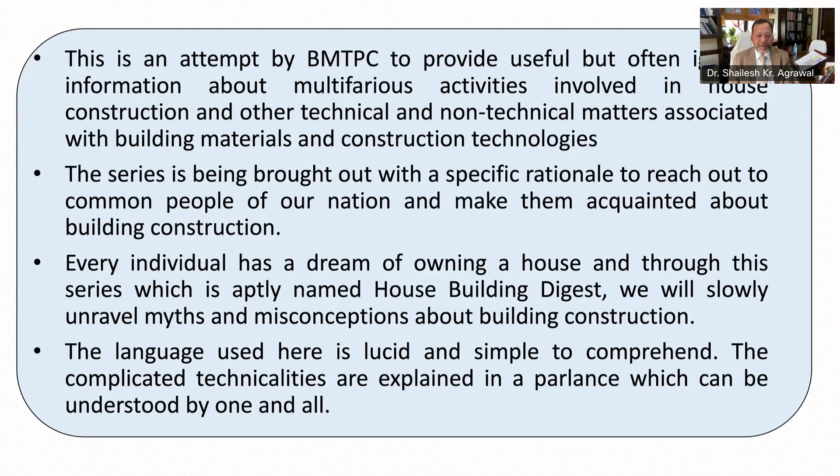Through this digest series, BMTPC is reaching out to the common man to provide useful information about various essential activities involved in house construction, including technical and non-technical matters associated with building materials and construction technologies. Every individual has a dream of owning a house, and through this series, we will slowly unravel myths and misconceptions about building construction. The language used here is simple so that it is understood by one and all.

A house should be constructed in a manner that it does not allow or prevent, or at least minimizes, the ingress of moisture within. In other words, the building should be dry once it has been occupied. It calls for adequate precautions during construction as well as during its occupation. Otherwise, it leads to dampness of various elements of the house, causing unhygienic environment.

Damp environment is also the root cause of various diseases like pneumonia, rheumatic fever, common cold, etc., to name a few. It also precipitates damage to walls, plasters, paints, floors, roofs, which end up in foul smells and unhealthy, unhygienic living conditions besides being unsightly. Termites also tend to grow in damp environment, which affect the furniture, clothes, books, documents, etc.

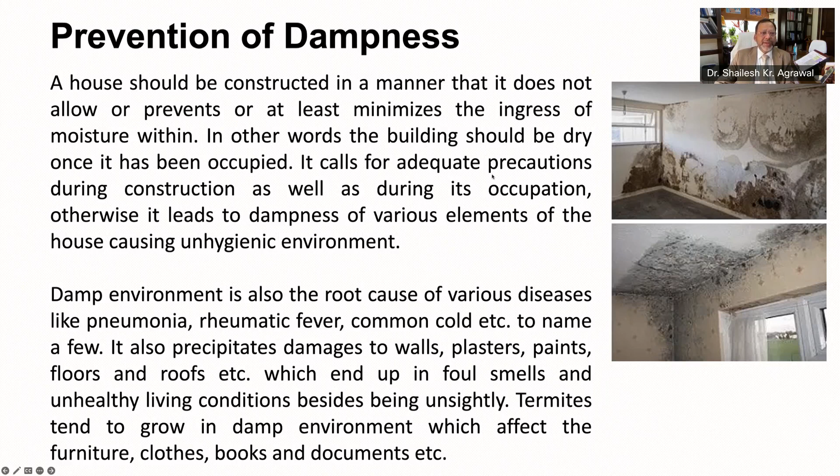Dampness can occur on account of rain, which strikes on the exposed surfaces of the house and finds its way within through the walls and joints, etc. It can also occur if proper precautions are not taken in its architectural or engineering design, use of inferior quality of materials, bad workmanship, insufficient supervision, and non-adherence to the construction specifications.

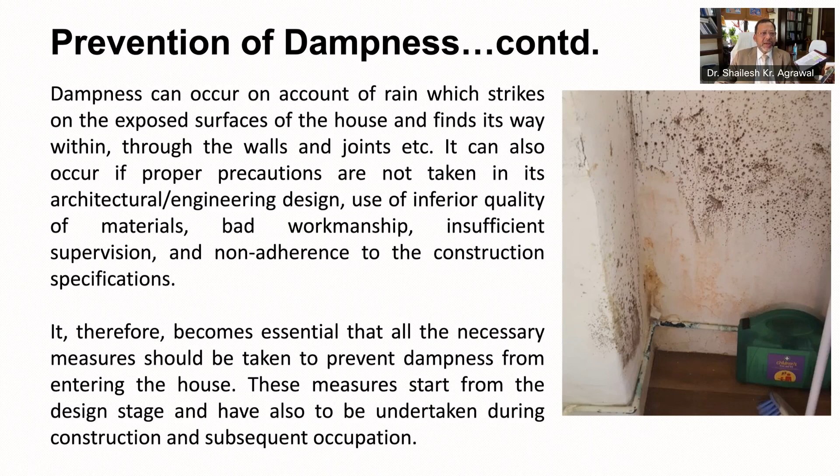It therefore becomes essential that all the necessary measures should be taken to prevent dampness from entering the house. These measures start from the design stage and have also to be undertaken during construction and subsequent occupation. Accordingly, the house should be maintained properly and the defects rectified as and when noticed.

The treatment given to prevent leakages in the house is generally termed as waterproofing, whereas treatment given to keep the walls, floors, and basement dry is termed as dampproofing. The house owner is advised to seek the help of an architect or an engineer for carrying out waterproofing and dampproofing in the house. Let's discuss the defects.

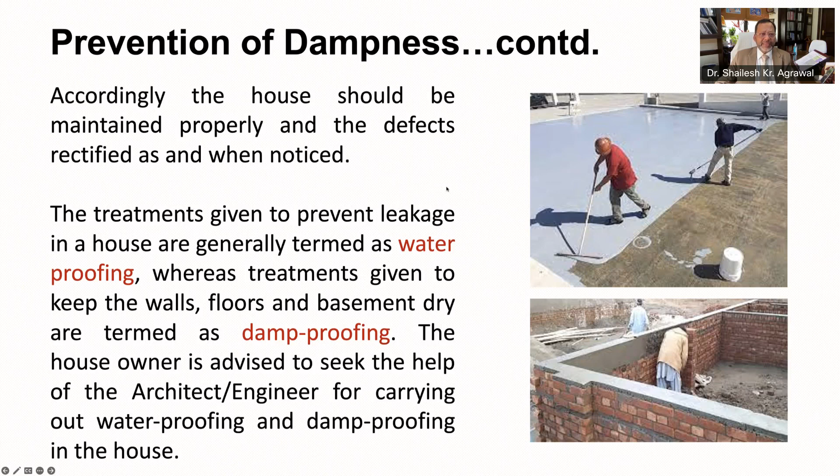The defects caused by dampness can broadly be summarized as under: growth of termites, occurrence of efflorescence, which ultimately results in disintegration of bricks, tiles, stones, or any other cladding material, softening of plaster, bleaching and flaking of paints with formation of colored patches, corrosion of metals, deterioration of floors and roofs, deterioration of electrical fittings, rotting of timber, breeding of mosquitoes, unhealthy living conditions.

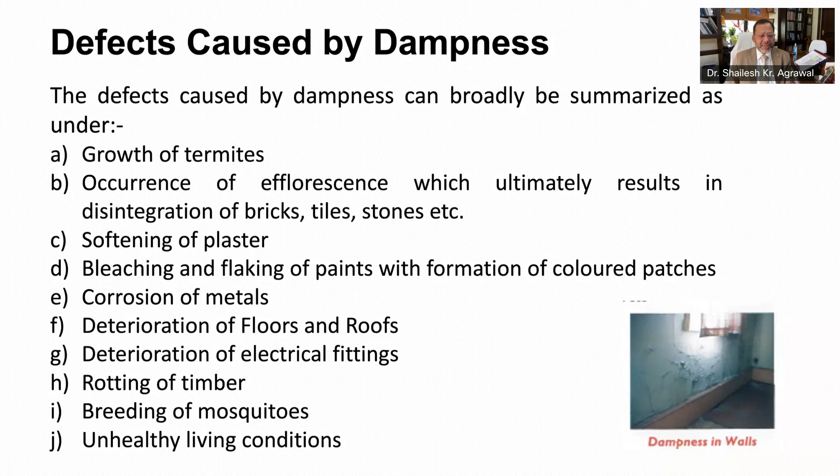Moisture absorption in the structure of the house is one of the chief causes of dampness. It may occur on account of penetration of rainwater or on account of defective construction. The coarse and granular nature of building materials results in the moisture finding an easy access through the voids therein, and this, aided by capillary action, assists the moisture to travel in different directions.

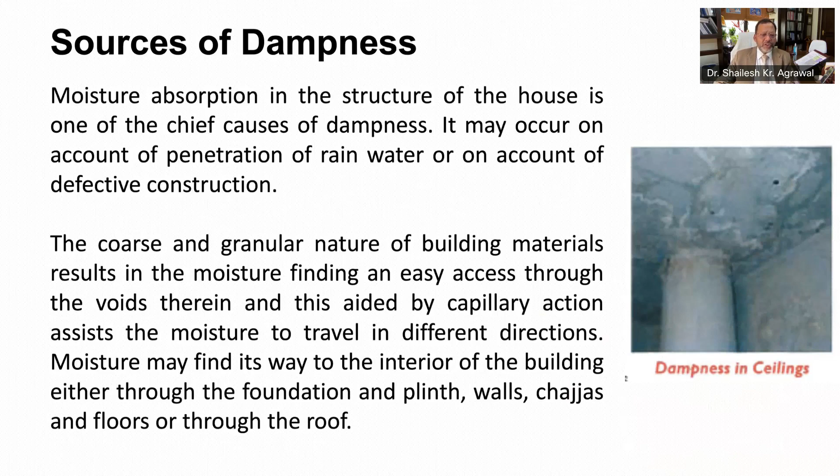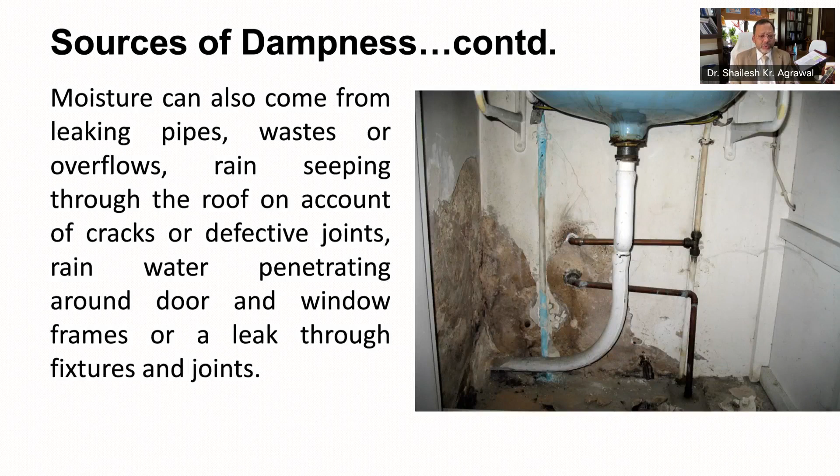Moisture may find its way to the interior of the building either through the foundation and plinth, walls, chajjas or sunshades, and floor, or through the roof. Moisture can also come from leaking pipes, waste or overflows, rain seeping through the roof on account of cracks or defective joints, rainwater penetrating around door and window frames, or a leak through fixtures and joints.

Broadly, dampness can occur in a house on account of the following reasons: dampness rising through foundations, splashing rainwater on the walls, penetration of rainwater through unprotected tops of walls, parapets, etc., inadequate slopes in flat roofs, defective terracing on roofs, and improper rainwater pipe connections, defective junctions between roof slabs and parapet walls, condensation of atmospheric moisture, leakages in wet areas of a building like kitchen, bathrooms, WC, etc.

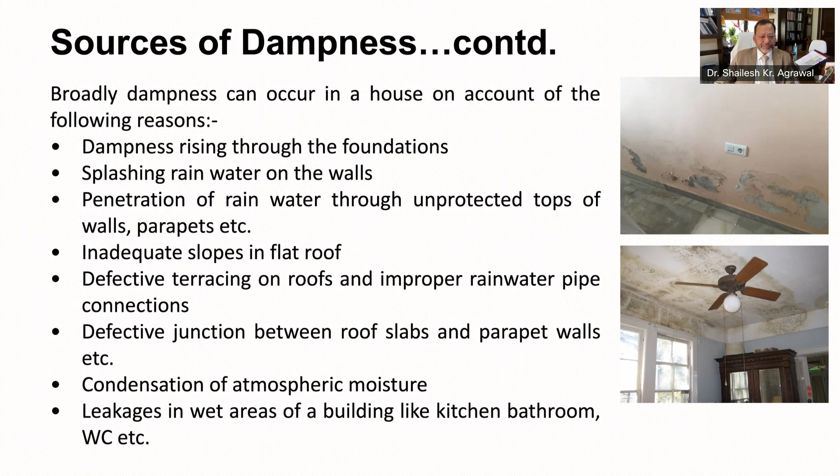Building science has come up with a number of methods for the prevention of dampness in a building. These methods can broadly be classified as membrane dampproofing, integral dampproofing, surface treatment, and guniting. Let's look at them one by one.

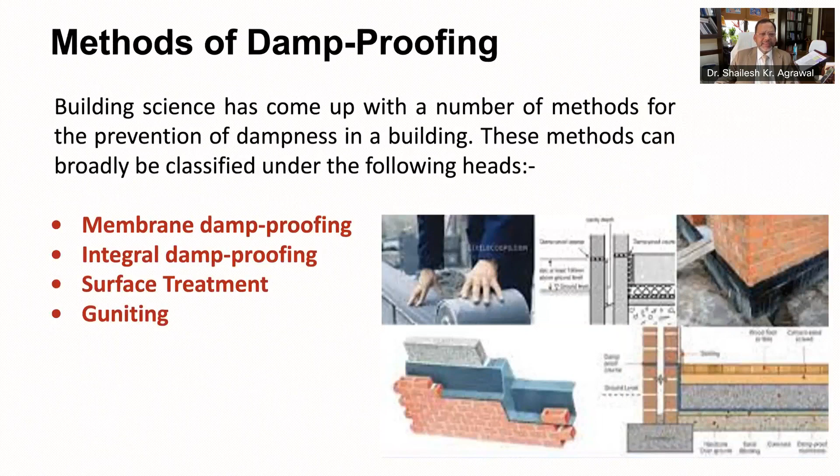Membrane dampproofing consists of providing a layer of water repellent material or a membrane between the source of dampness and the element of the structure. This type of layer is generally known as dampproofing course or DPC. It may comprise materials like bitumen felt, mastic asphalts, polymers, plastic or polythene sheets, cement concrete, etc.

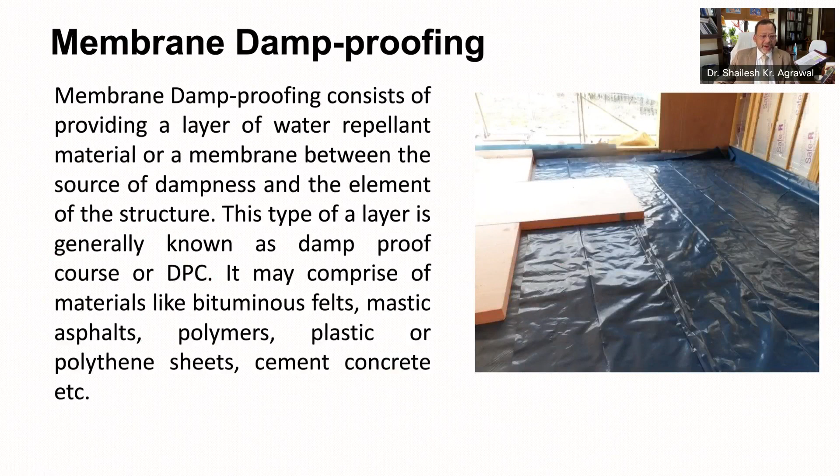Integral dampproofing is a process of making certain building materials impervious such that water is unable to penetrate through it. This generally involves adding specified dampproofing compounds in cement for the concrete or mortar mix. Such compounds are available in the market in powdered as well as liquid form. The quantum of waterproofing compounds to be added in cement depends upon the manufacturer's recommendations. Generally, 1 kilogram of such a compound is added per bag of cement.

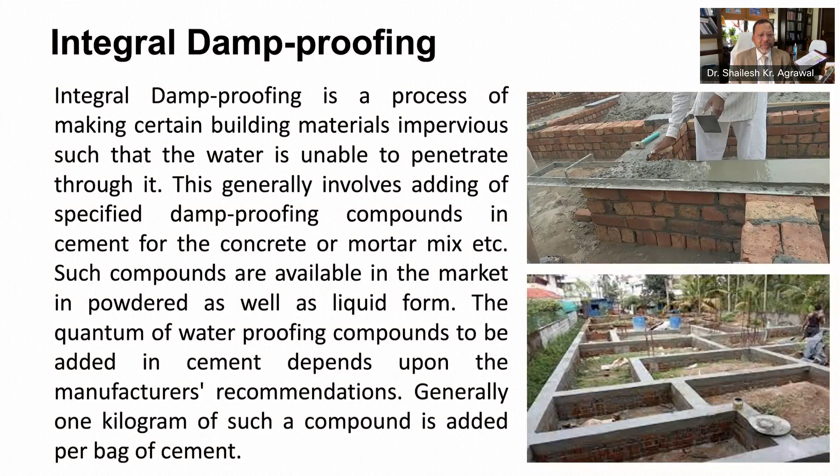Surface treatment consists of filling up the pores of surfaces which are subjected to dampness. Since bricks display the property of porosity, surface treatment in the form of plastering is usually resorted to prevent the dampness. One of the commonly used plasters is the lime cement plaster, which consists of cement, lime, and sand mixed in proportion of

1:1:6. Brick surfaces or even plastered surfaces can be provided with water repellent paints, which are quite effective in protecting the building against the ravages of heavy rainfall. The house owner is advised to discuss the issue with the architect in order to adequately protect the walls from

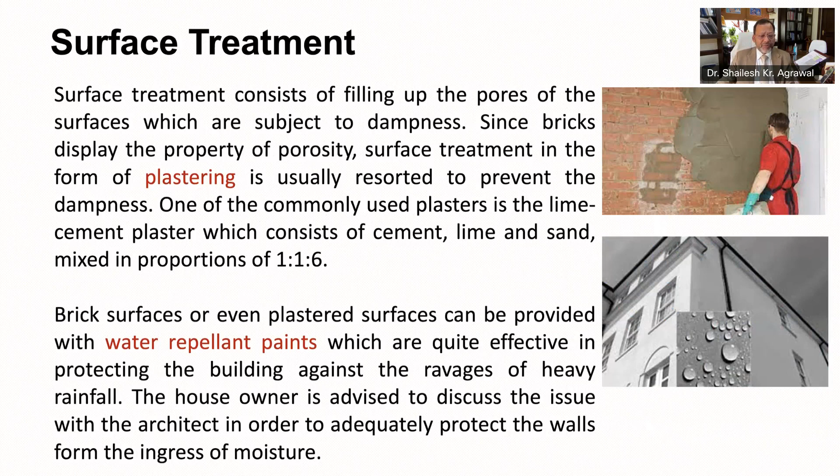Guniting is also done on other surfaces like floors, etc. to provide an impervious layer below. It is also done for rehabilitation of existing structures, retrofitting or strengthening of weak structures, etc.

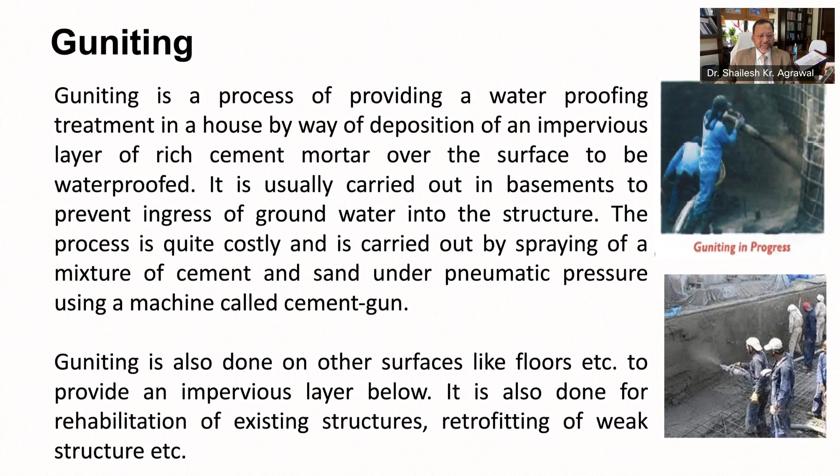The process of providing damp-proof arrangements in a house commences right from the planning stage when the specifications are being drawn up. The measures to be taken are largely dependent upon the site conditions, climate conditions, and also the budget of the house owner. The measures to be undertaken during construction of a house include treatment of foundations and plinth, treatment of floors, treatment of walls, treatment of flat roofs, and treatment of parapets. Let's understand them one by one.

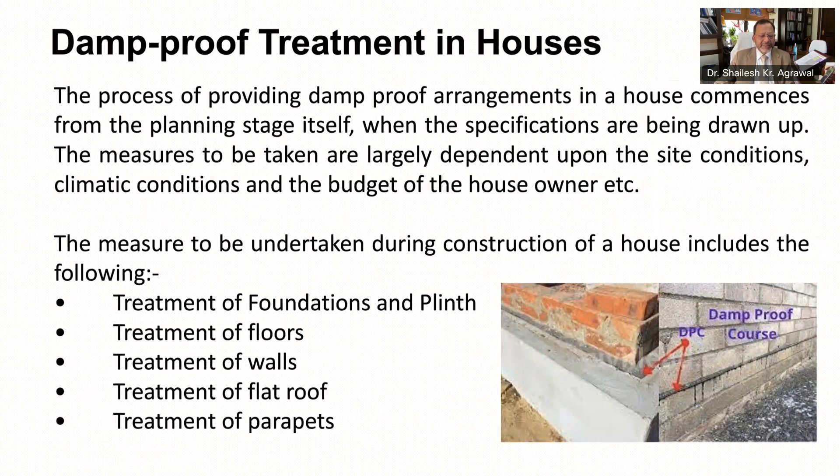Treatment of foundations is dependent upon the groundwater level on which the building is to be constructed. Precautions should be taken to provide the plinth level of a house above the level of a road in order to prevent the surface runoff from the road entering into the house. The requisite characteristics of a healthy site for a house include a dry, porous, permeable soil, a low and non-fluctuating groundwater level, and a soil retaining very little dampness which is free from organic impurities. Exposure to sunlight and free circulation of air are also requisite for prevention of dampness.

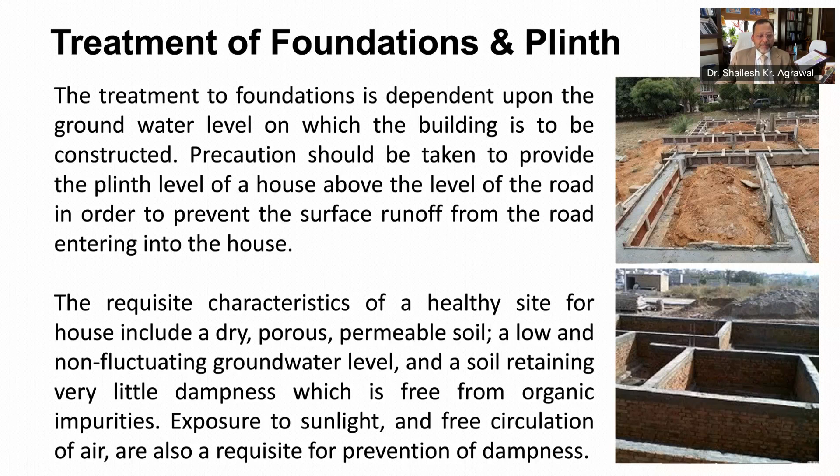A damp proofing course is provided all along the plinth level of the house to arrest the ingress of moisture from the foundations to the superstructure walls. Provision of DPC includes cleaning up of the horizontal brick surface at the plinth level, applying a hot coat of bitumen, and then laying a 40 mm course of cement concrete in the ratio of 1:2:4. The superstructure walls can then be constructed over this DPC. The damp proofing course may also consist of asphalt, sheet bitumen, a double course of slates in cement, or stoneware slabs especially made for the purpose.

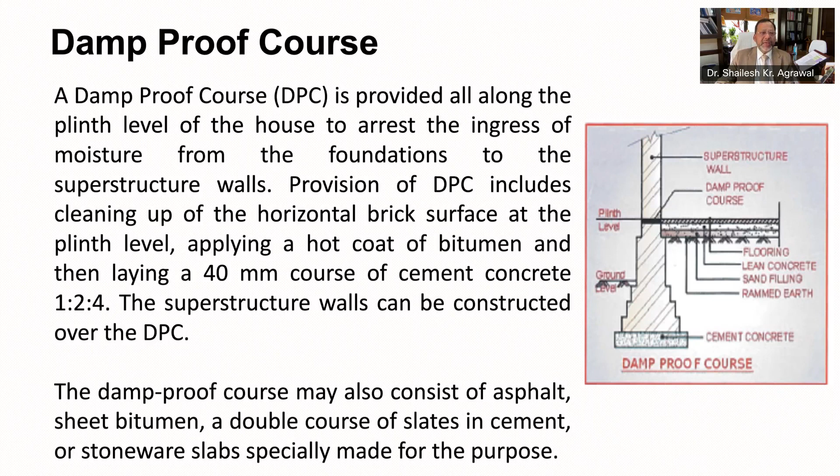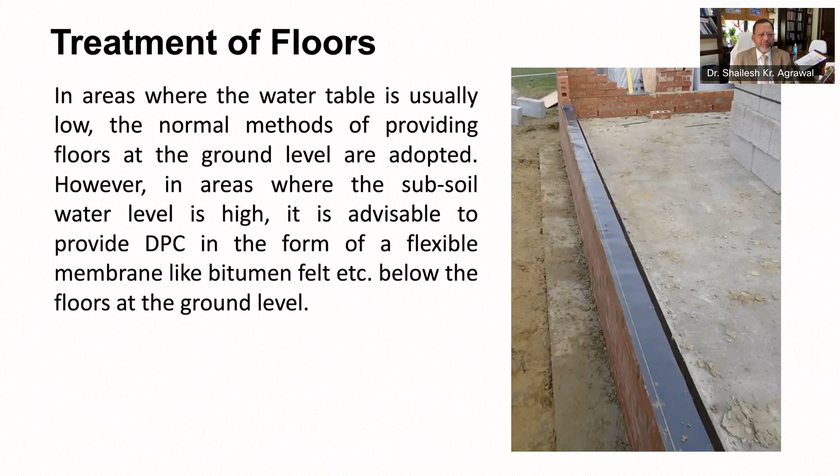In areas where the water table is usually low, the normal methods of providing floors at the ground level are adopted. However, in areas where the subsoil water level is high, it is advisable to provide DPC in the form of a flexible membrane like bitumen felt, etc. below the floors at the ground level.

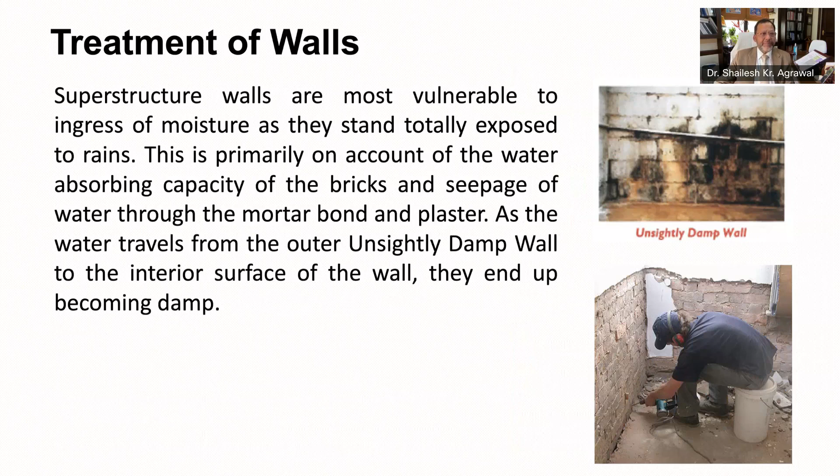Superstructure walls are most vulnerable to ingress of moisture as they stand totally exposed to rain. This is primarily on account of the water absorbing capacity of bricks and seepage of water through the mortar, bond and plaster. As the water travels from the outer wall to the interior surface of the wall, the interior ends up becoming damp. This leads to unsightly appearances, peeling of plasters, paints, etc. Dampness also results in unhealthy living conditions, which is harmful for the occupants of the house.

Generally, the walls of a house are liable to become damp by virtue of water rising in them from damp earth and foundation, rain falling directly upon the exteriors of the walls, leaking pipes and other connections, and water seeping through the exposed top surface of the walls.

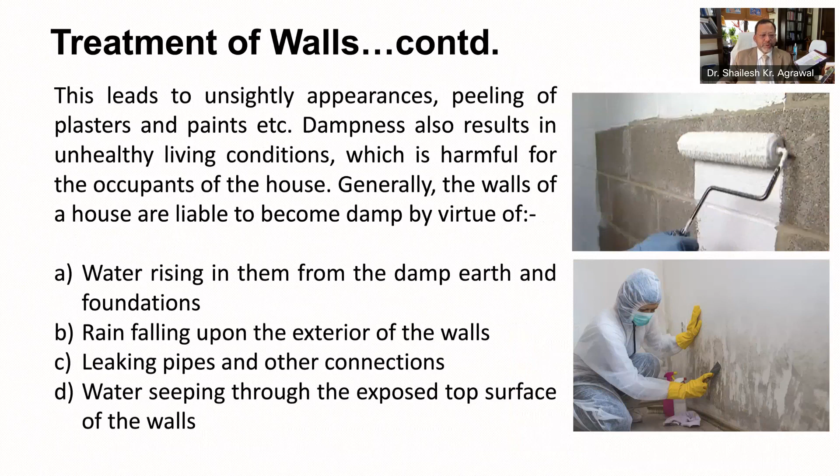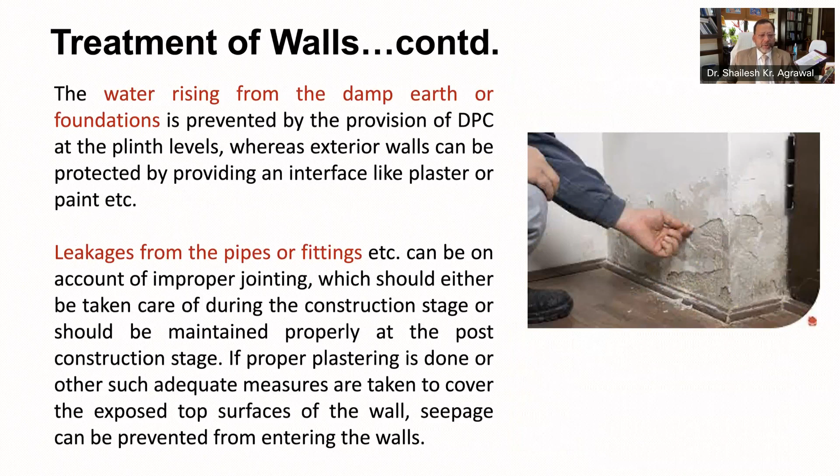The water rising from the damp earth or foundation is prevented by the provision of DPC at the plinth level, whereas exterior walls can be protected by providing an interface like plaster or paint, etc. Leakages from pipes or fittings can be on account of improper jointing, which should either be taken care of during the construction stage or should be maintained properly at post-construction stage. If proper plastering is done or other such adequate measures are taken to cover the exposed top surfaces of the wall, seepage can be prevented from entering the walls.

In any case, in order to prevent dampness from entering through the walls of a house, it is necessary that they should be constructed of sound materials, as porous bricks and weak mortar readily absorb moisture they come in contact with. Along with the materials, the workmanship should be proper and the brick bond be laid properly and the mortar joint properly staggered. Finally, curing of exposed brick work and plaster should also be carried out for the required duration.

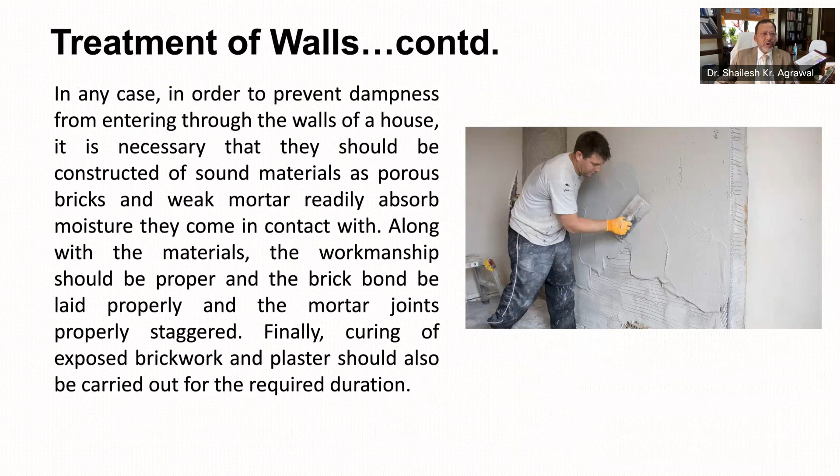The normal precautions for the prevention of dampness in walls include pointing, plastering, and painting on brick surfaces. In areas subject to high rainfall, it is advised to provide cement plaster in proportions of 1:4 mixed with waterproofing compounds. Such compounds are readily available in the market and have to be mixed with cement in the recommended proportions. Another way is to paint the plaster with waterproof cement paints.

In addition, the window sills should stand out beyond the face of the wall and have a small groove on the underside of the projection. This groove breaks the run of the water towards the wall. The shades provided in the house should span beyond the width of doors and windows. This shade should also be provided with a groove at its underside to break the path of the water, also known as drip course.

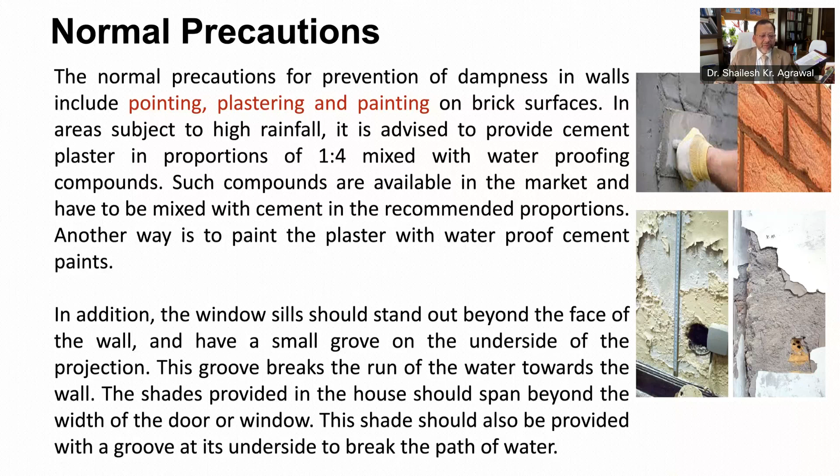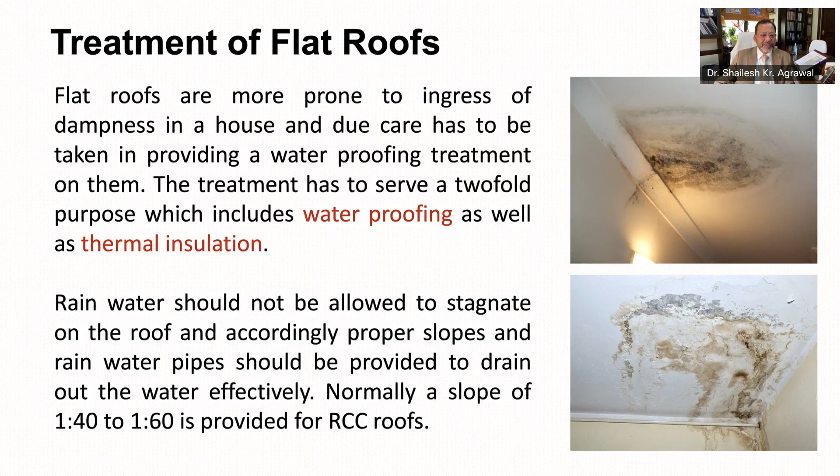Flat roofs are also prone to ingress of dampness in a house, and due care has to be taken in providing a waterproofing treatment on them. The treatment has to serve a twofold purpose, which includes waterproofing as well as thermal insulation. Rainwater should not be allowed to stagnate on the roof, and accordingly, proper slopes and rainwater pipes should be provided to drain out the water effectively. Normally, a slope of 1:40 to 1:60 is provided for RCC roofs. These slopes can be provided in the waterproofing treatment proposed to be provided over the RCC surface.

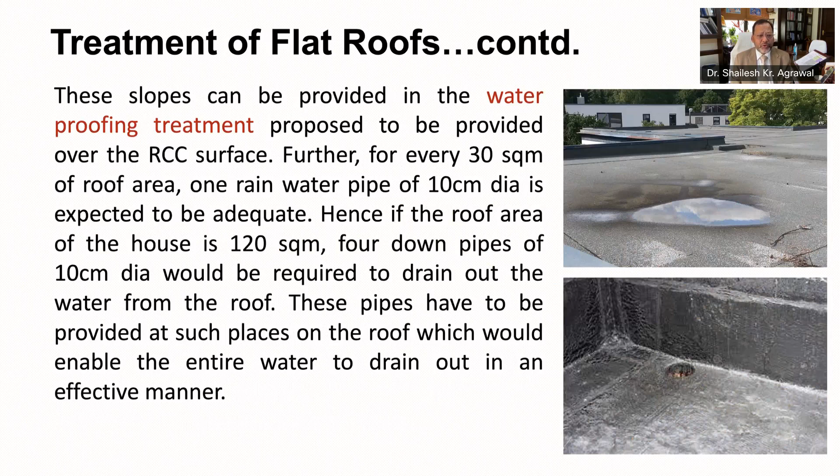Further, for every 30 square meter of roof area, one rainwater pipe of 10 centimeter dia or 4-inch dia is expected to be adequate. Hence, if the roof area of your house is 120 square meter or 1200 square feet, 4 down pipes of 10 centimeter dia would be required to drain out the water from the roof. These pipes have to be provided at such places on the roof which would enable the rainwater to drain out in an effective manner. On the flat roof, waterproofing treatment can be provided in a number of ways, which generally include the following: laying of bitumen felt, lime concrete terracing, lime concrete with tiles, mud phuska with tiles, brick coba treatment, and chemical treatment. Let's understand them one by one.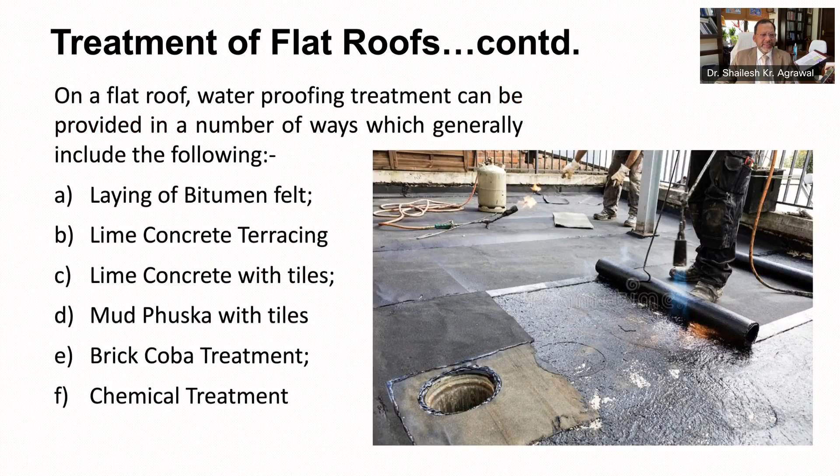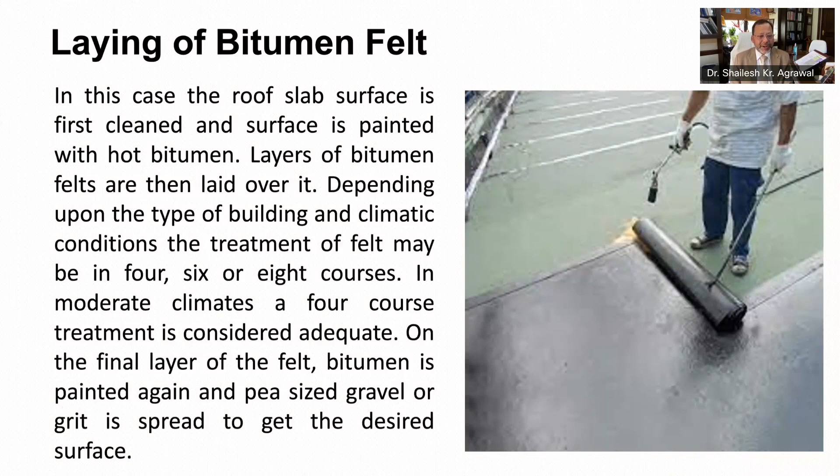In laying of bitumen felt, the roof slab surface is first cleaned and surface is painted with hot bitumen. Layers of bitumen felts are then laid over it. Depending upon the type of building and climatic conditions, the treatment of felt may be in 4, 6, or 8 courses. In moderate climate, a 4-course treatment is considered adequate. On the final layer of the felt, bitumen is painted again and pea-sized gravel or grit is spread to get the desired surface. Lime concrete terracing is best suited for zones having hot and humid climate conditions, especially those close to sea.

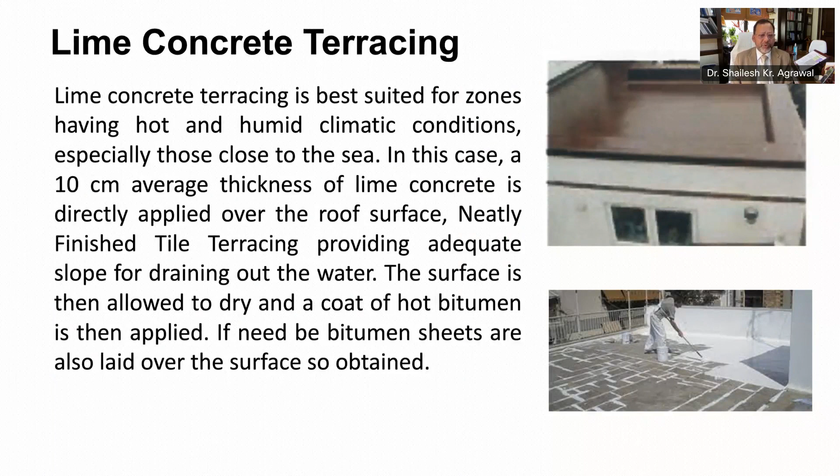In this case, a 10 centimeter average thickness of lime concrete is directly applied over the roof surface. Neatly finished tile terracing providing adequate slope for draining out the water. The surface is then allowed to dry and a coat of hot bitumen is then applied. If need be, bitumen sheets can also be laid over the surface so obtained.

Such a type of waterproofing, which is the lime concrete with tiles, is usually provided if the terrace is expected to be used by the occupants for sleeping or any other such purpose. In this case, the top of the roof surface is first painted with hot bitumen and a layer of coarse sand is spread. While the bitumen is still hot, lime concrete layer of average 10 centimeter thickness is then applied, providing the slope therein. The layer is then compacted and 2 courses of tiles are provided with the joints being pointed in cement mortar of 1:3 to get an even surface.

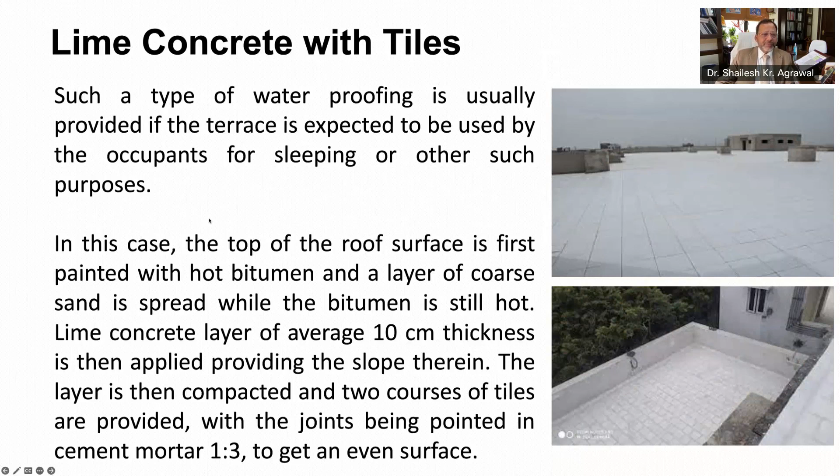Treatment with mud phuska and tile is best suited for areas in hot and arid regions like Delhi, UP, Punjab, etc., where the annual rainfall does not exceed 1000 mm. The treatment normally consists of painting the roof surface with hot bitumen, followed immediately by spreading coarse sand. While the bitumen is still hot, mud phuska treatment is then applied, which consists of puddle clay mixed with straw

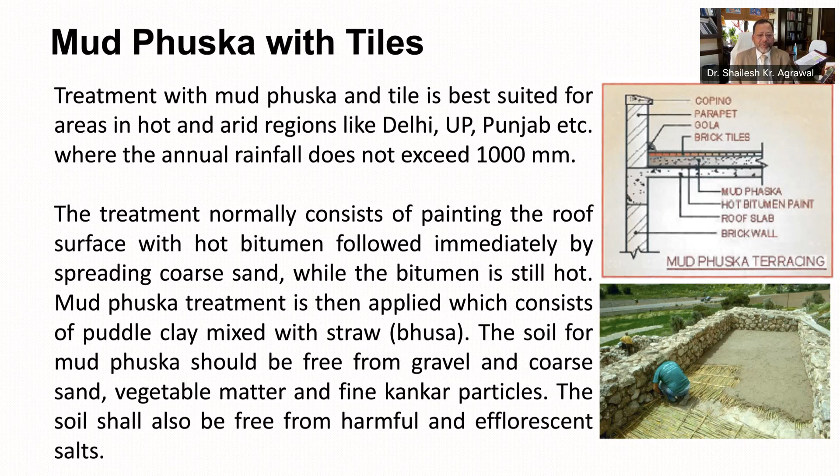or bhusa. The soil for mud phuska should be free from gravel and coarse sand, vegetable material, and fine kankar particles. The soil should also be free from harmful and efflorescent salts. The surface so obtained is plastered with a mix of clay and cow dung in 1 or 2 coats. Tiles are finally laid on the plastered surface and the joints are grouted with cement mortar of 1:3 to get

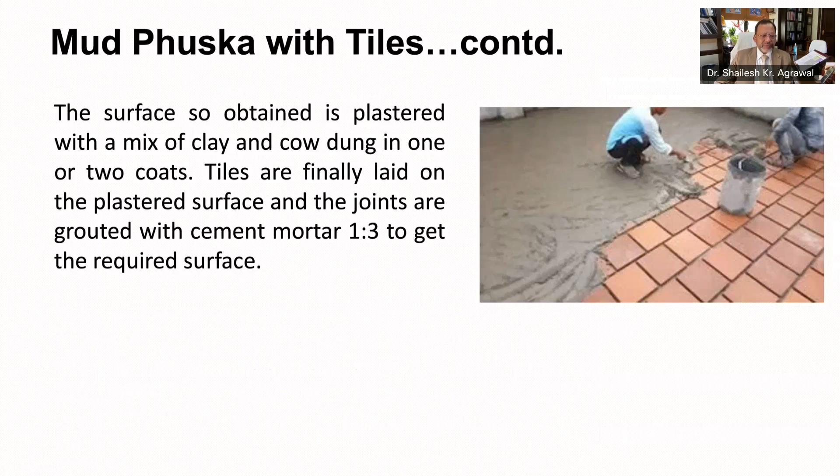the required surface. Brick coba treatment is suited for areas which have moderate to heavy rainfalls. In this case, the roof surface is first cleaned and a thick layer of mixture of cement and acrylic based chemical is laid. This is followed by providing a layer of brick bats in cement mortar of 1:4 ratio. After curing the layer for about 2 days, another coat of brick bats in cement mortar 1:4 is provided.

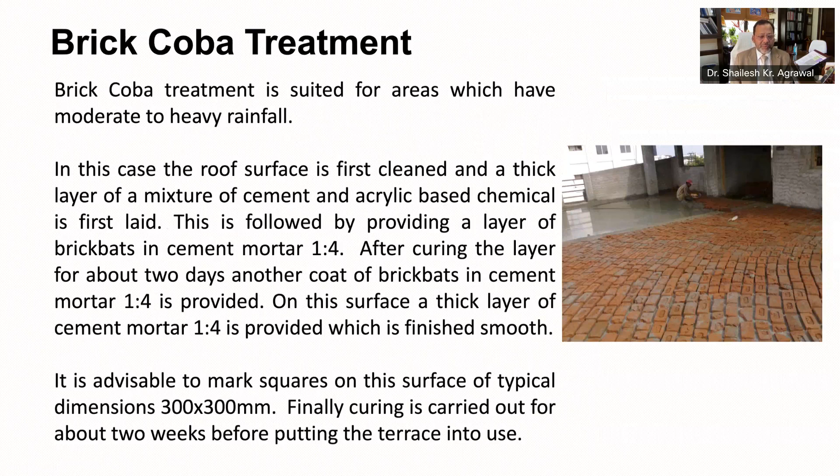On this surface, a thick layer of cement mortar 1:4 is provided, which is finished smooth. It is always advisable to mark squares on this surface of typical dimensions, let's say 300 mm by 300 mm. Finally, curing is carried out for about 2 weeks before putting the terrace into use.

Chemical treatment. Roof terraces can also be treated for waterproofing by providing a chemical treatment on the surfaces. It can also be used for waterproofing of concrete and cement mortar in basements, water retaining structures, external plastering, bathrooms, balconies, water tanks, sumps and drains. The method of application, however, varies with the location at which waterproofing is to be provided.

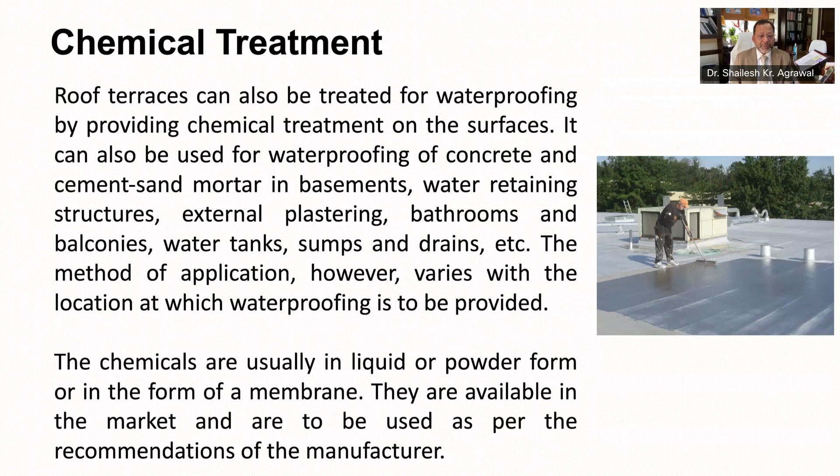The chemicals are usually in liquid or powder form or in the form of a membrane. They are available in the market and are to be strictly used as per the recommendations of the manufacturers. As far as liquid or powder is concerned, the same are available in the form of surface applied treatments or admixture technology. The former is to be applied directly on the roof surface and the latter is to be mixed with cement as a plaster on the concrete surface.

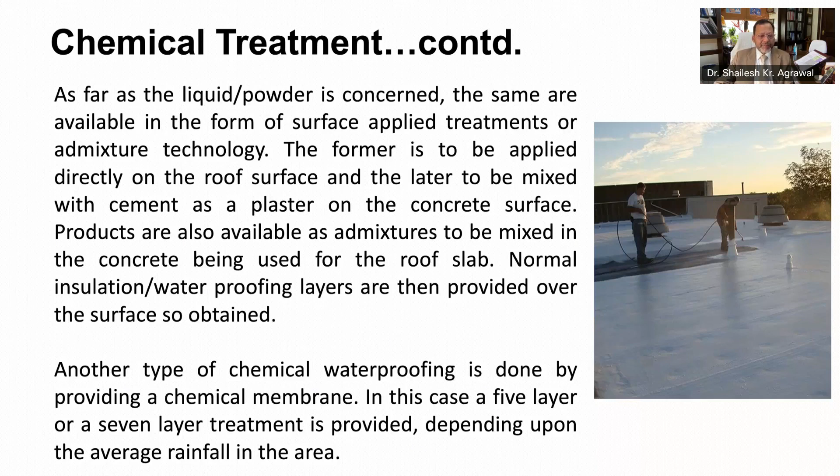Products are also available as admixtures to be mixed in concrete being used for the roof slab. Normal insulation waterproofing layers are then provided over the surface so obtained. Another type of chemical waterproofing is done by providing a chemical membrane. In this case, a 5-layer or 7-layer treatment is provided depending upon the average rainfall in the area. Typically, a 5-layer membrane treatment would consist of the following.

First, application of first coat of bitumen primer, then providing a coat of bonding material, then laying of atactic polypropylene modified polymeric membrane, then providing another coat of bonding material, and then providing top layer of surface finish, say brick tiles. The surface on which the treatment has to be applied has to be cleaned properly before application of the treatment. The house owner is advised to have the opinion of an architect or engineer before going in for chemical waterproofing treatments

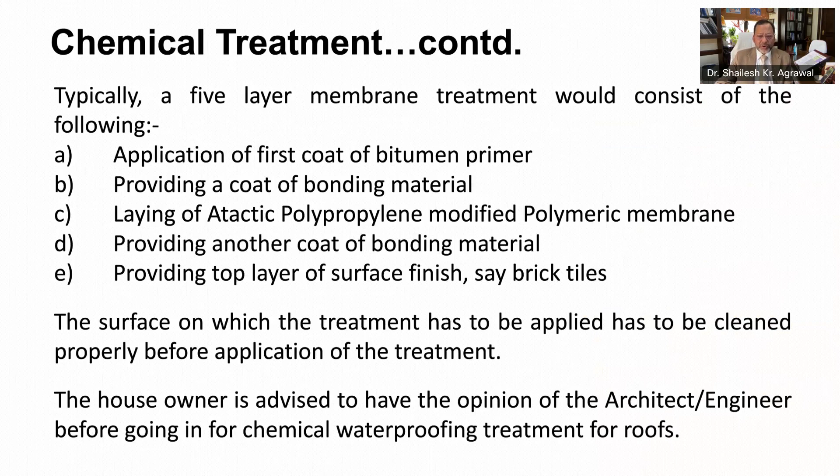for roofs. Water usually tends to seep through the joints between the parapet walls and roof, and therefore it is very important that adequate precautions are taken to treat parapets and roof joints. Otherwise, dampness will occur on the wall surfaces as also the underside of the roof slab. The treatment in this case can be provided as per the normal waterproofing methods carried out for the flat roof.

In cases where lime concrete terracing is carried out, a 15 centimeter half round gola of lime concrete is provided at the junction of the roof and parapet where asphalt layers are provided. The asphalt layer is turned up into the parapet wall for at least up to 15 centimeter, thereby covering the junction of roof and the parapet. Parapet walls require careful detailing. At the top of the wall, it is good practice to provide a weathered coping.

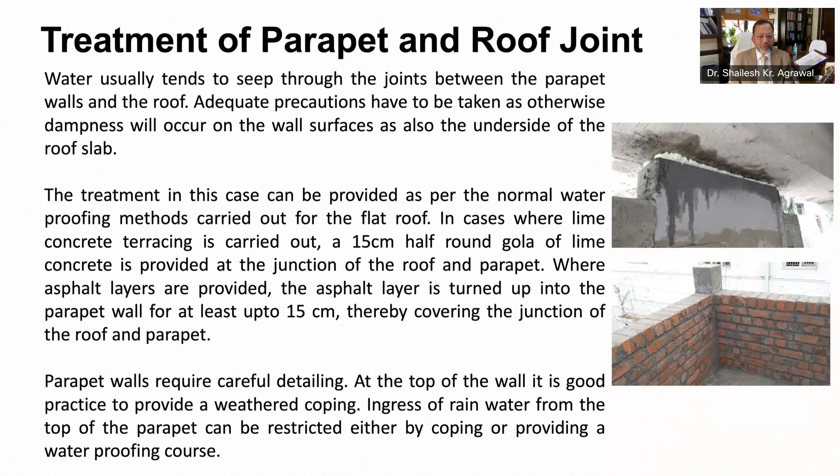Ingress of rainwater from the top of parapet can be restricted either by coping or by providing a waterproofing course, which is very important. There is another important component which is khurra. Khurra is an essential feature for allowing the water flowing from the roof to flush out, thereby preventing the rainwater to seep into the roof slabs.

It is a depressed portion in the roof just before the outlet of rainwater pipe. A khurra is generally 45 centimeter by 45 centimeter in size. Khurras are constructed before the brick masonry work in parapet wall is taken up and is normally provided in cement concrete of 1:2:4 mix, where 1 is cement, 2 is coarse sand, and 4 is stone aggregate of 5 centimeter thickness or other mix as may be specified by the architect.

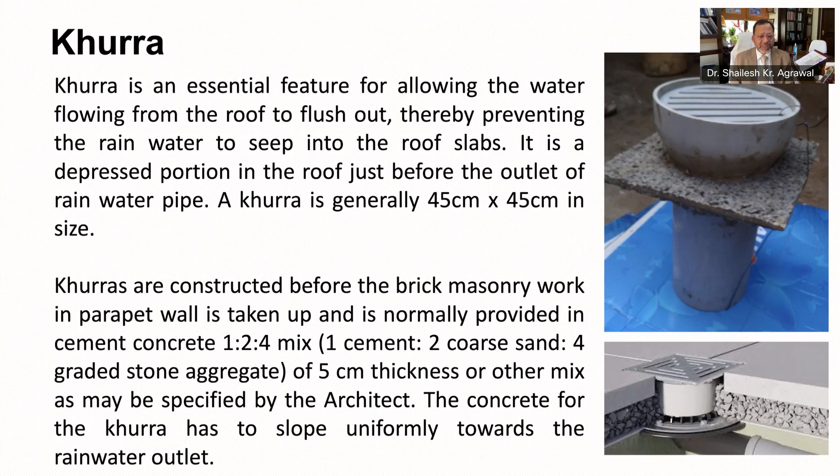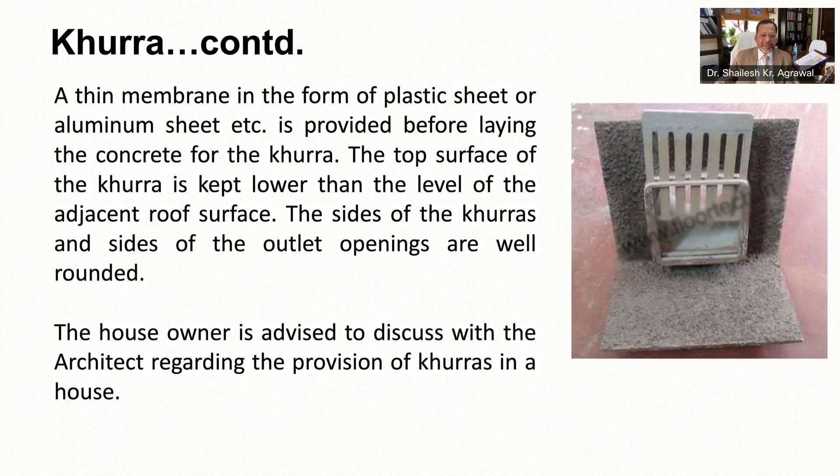The concrete for the khurra has to be sloped uniformly towards the rainwater outlet. A thin membrane in form of plastic sheet or aluminum sheet, etc., is provided before laying the concrete for the khurra. The top surface of the khurra is kept lower than the level of adjacent roof surface. The sides of khurras and the sides of the outlet opening are well rounded. The house owner is advised to discuss with architect regarding the provisions of khurra in the house.

Waterproofing of wet areas. Wet areas in a house are those areas which are likely to get wet during its occupation. Typically, these include bathrooms, toilets, and kitchens. In the kitchen, the wet area is largely localized as water gets directed to a specified area. Toilets and bathrooms are different in that considerable quantities of water are consumed and flow through them each time they are used. Special waterproofing treatment is therefore required in such areas.

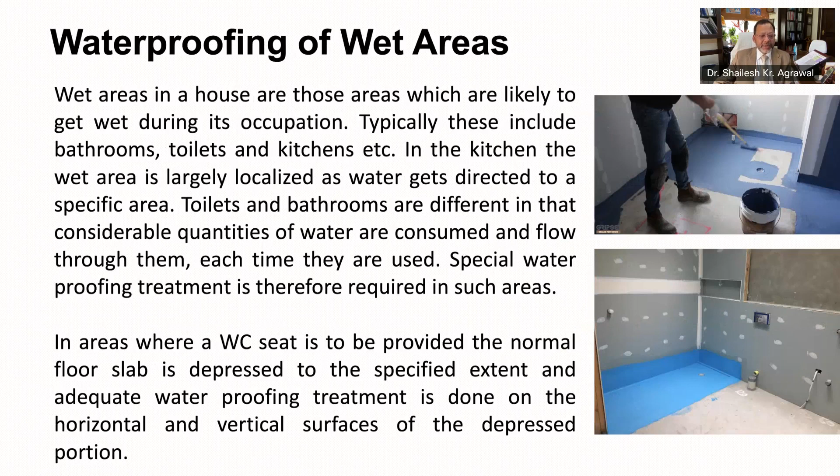In areas where a WC seat is to be provided, the normal floor slab is depressed to the specified extent, and adequate waterproofing treatment is done on the horizontal and vertical surfaces of the depressed portion. The horizontal and vertical surfaces of the slab concrete are hacked and cement slurry, preferably prepared with waterproofing compound, is first applied. Cement plastering in proportion of 1:3 is then done with waterproofing compound mixed in the cement. On drying of the surface, a specified quantity of bitumen is applied on both the horizontal and vertical surfaces, followed by sticking a PVC sheet on the surface.

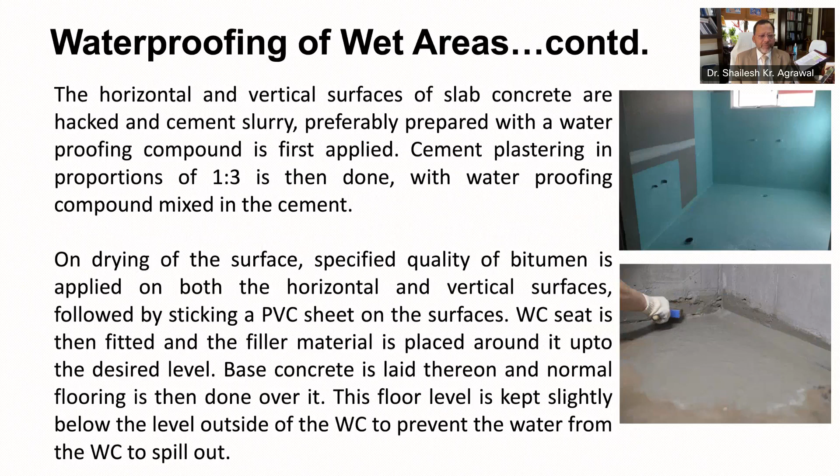WC seat is then fitted and the filler material is placed around it up to the desired level. Base concrete is laid thereon and normal flooring is then done over it. This floor level is kept slightly below the level outside of the WC to prevent the water from WC to spill out. Similarly, in the bathrooms, normal waterproofing measures are taken, and in addition, tiles are provided up to a height of, say, around 7 feet above the floor. This prevents the splashing water from dampening the wall surface. This treatment is also termed as dado.

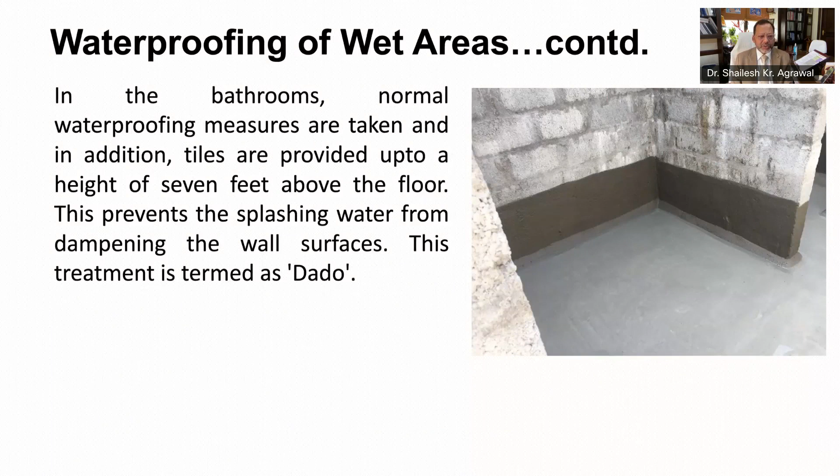At last, occurrence of dampness in a house is common if adequate precautions are not taken during its construction. Dampness leads to unhealthy living condition, unsightly patches on walls and ceilings, etc. And it also leads to an increase in cost of maintenance. The measures written here would go a long way in preventing dampness to enter into the house.

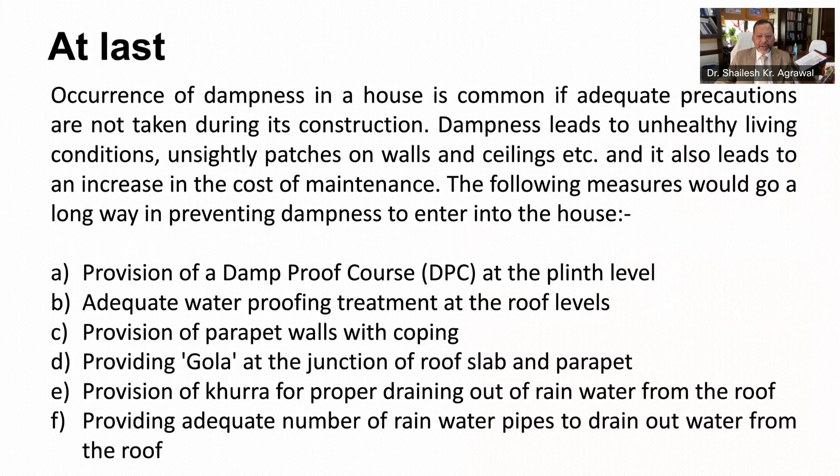First, provision of a damp-proof course or DPC at the plinth level, adequate waterproofing treatment at the roof levels, provision of parapet walls with coping, providing gola as explained to you earlier at the junction of roof slab and parapet, provision of khurra as explained earlier for proper draining out of rainwater from the roof, providing adequate number of rainwater pipes to drain out water from the roof, provision of waterproofing treatment on the depressed portions of the slab in wet areas, proper jointing of pipes, jointing of doors and window frames adequately with the walls to prevent seepage of water, provisions of sunshade with grooves or drip course along the edges, use of good quality materials for construction and good workmanship, inspection and proper maintenance of the house.

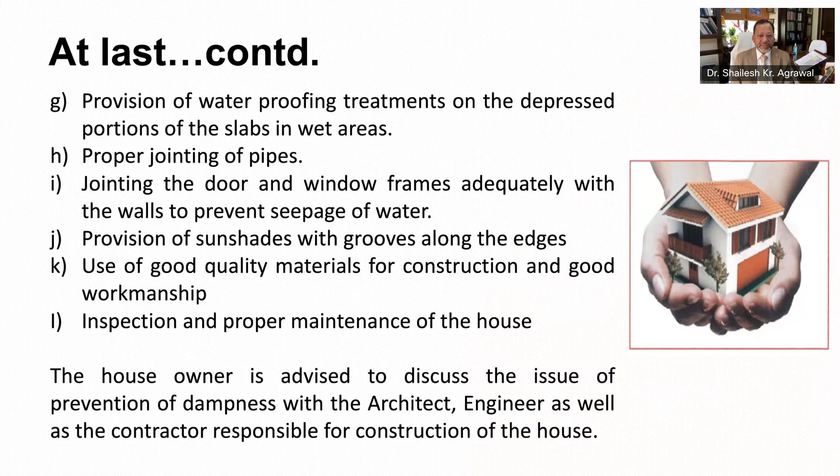The house owner is advised to discuss the issue of prevention of dampness with the architect, engineer, as well as the contractor responsible for construction of the house.